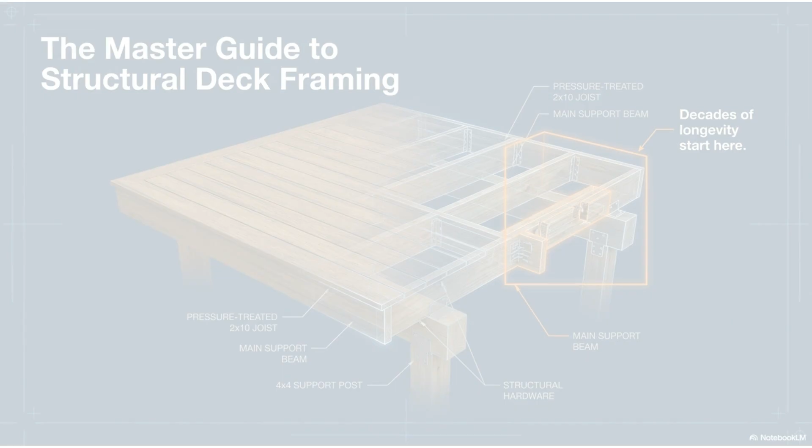Welcome to this video on structural deck framing. We will explore the essential components, such as joists, beams, and support posts, that provide the foundation for a long-lasting deck. While the deck finish is what everyone sees, the structural bones are what guarantee it lasts.

A solid deck starts from the demoed state. If the bones fail, the finish is irrelevant. As master builder D.C. Collins notes, this work is about more than just driving screws. It is about engineering a structure designed to outlast us.

Let us look at the anatomy of a structural node. Key elements include pressure-treated lumber for strength, ZMAX joist hangers to prevent corrosion, and hurricane ties for lateral stability.

When inspecting existing concrete piers and posts, you must determine if they are structurally sound. While major rot requires a new foundation, minor surface deterioration can be repaired using sealants.

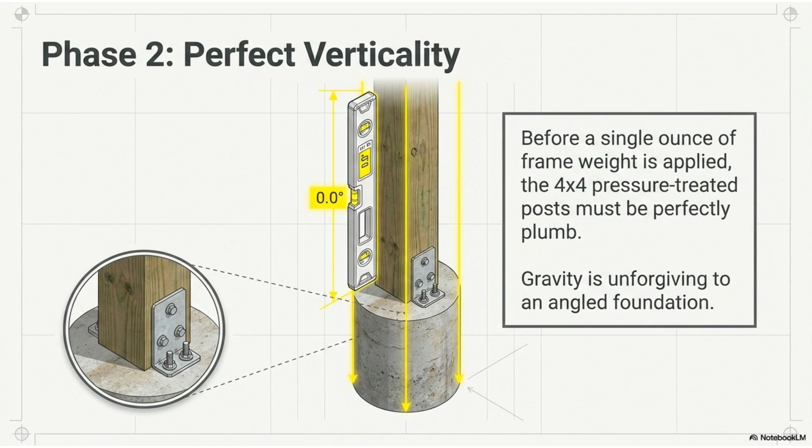Phase 2 focuses on perfect verticality. Before any weight is applied, your 4x4 pressure-treated posts must be perfectly plumb. Gravity is unforgiving to an angled foundation.

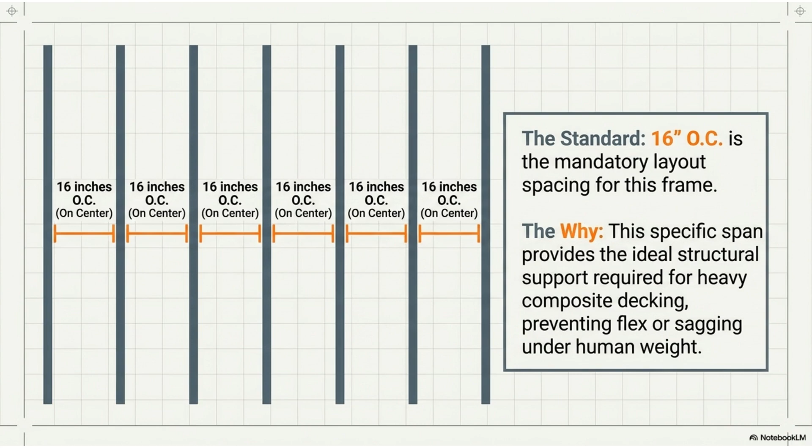For the framing layout, the industry standard is 16 inches on center. This spacing provides the necessary support for heavy composite decking, preventing sagging or flex under human weight.

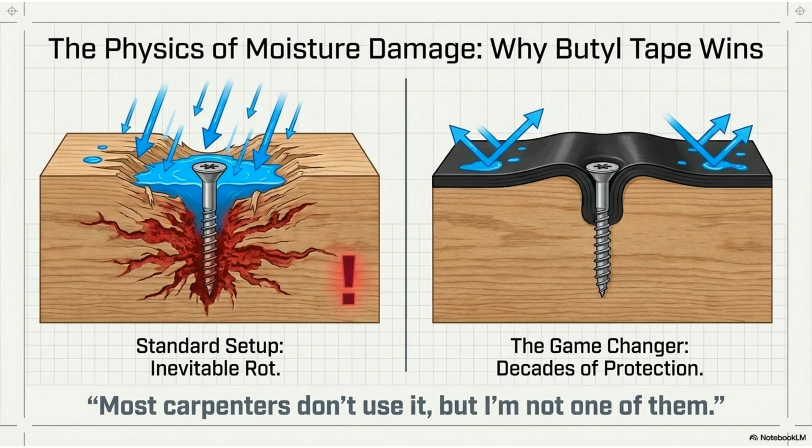The plane down technique is a master method for addressing uneven joists. By planing them flush, you ensure a perfectly level surface for your finished flooring. Understanding the physics of moisture damage is vital. While standard setups often lead to rot, using butyl joist tape protects the top grain of your lumber for decades.

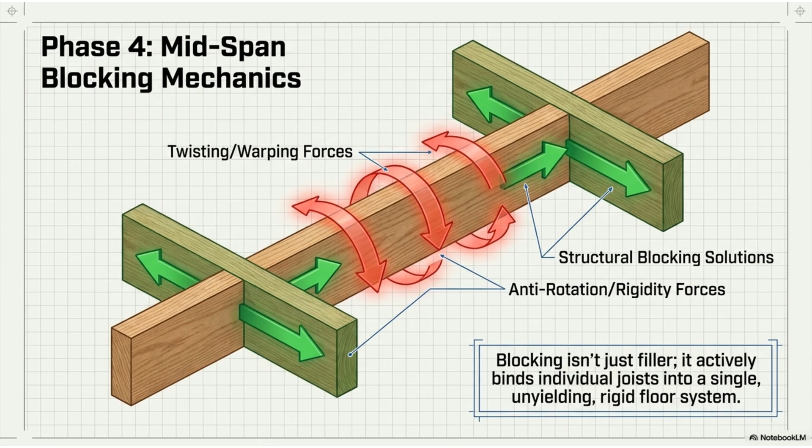Phase 4 covers mid-span blocking. Blocking is not just filler. It acts as a structural solution that binds individual joists together to resist twisting and warping forces.

When installing stair stringers, ensure the top anchor is securely mounted to the deck frame, and the bottom anchor rests flush on a solid, level landing pad.

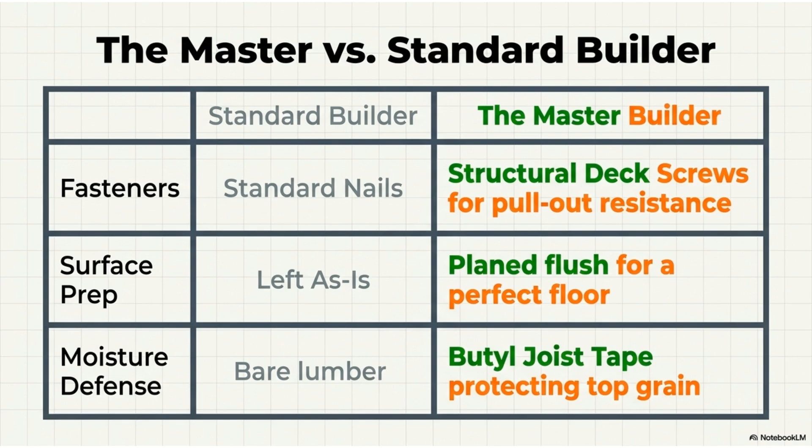This table compares the standard approach to the master builder's method. Using structural screws, planing boards, and applying joist tape sets a higher quality standard for your deck.

Before applying the finish, perform a final inspection. Ensure your posts are plumb, beams are hurricane tied, and that all joists, blocking, and top grains are properly prepared.

To summarize, the structural blueprint follows 4 steps: preparation, foundation, building the skeleton, and finally, stabilization.